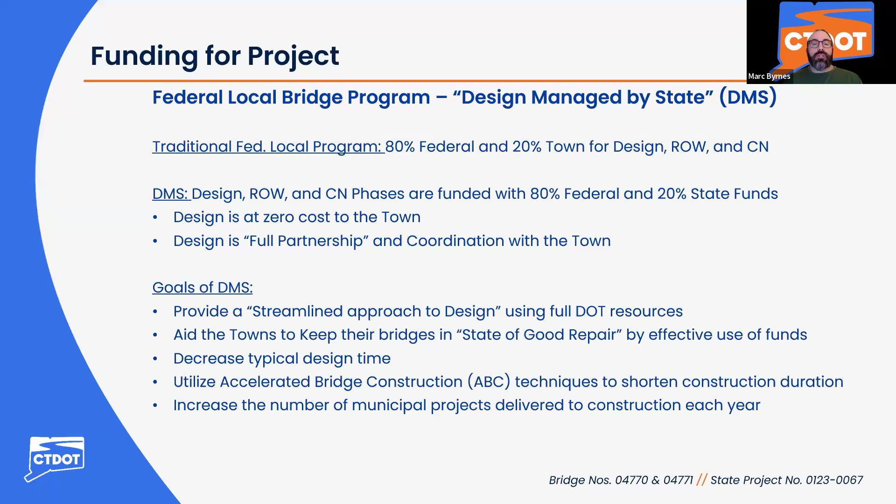Representing our consultant team at GM2 Associates is Mike Brady, project manager, and Dan Carnein, project engineer.

Bridges are rated on a scale of 0 to 9, with 9 being excellent and 0 being closed. Based on the conditions of the bridges tonight, these bridges are rated at 0, and corrective action is being taken.

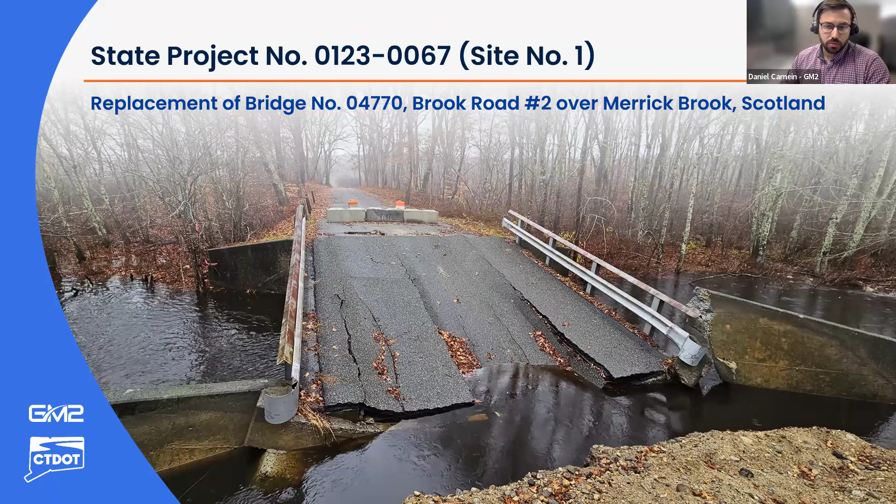We'll begin tonight with site number 1, bridge number 4770, which carries Brook Road over Merrick Brook. Site number 1 is located 0.8 miles north of the intersection with Route 14 and 97, and also 0.4 miles north of site number 2, bridge number 4771.

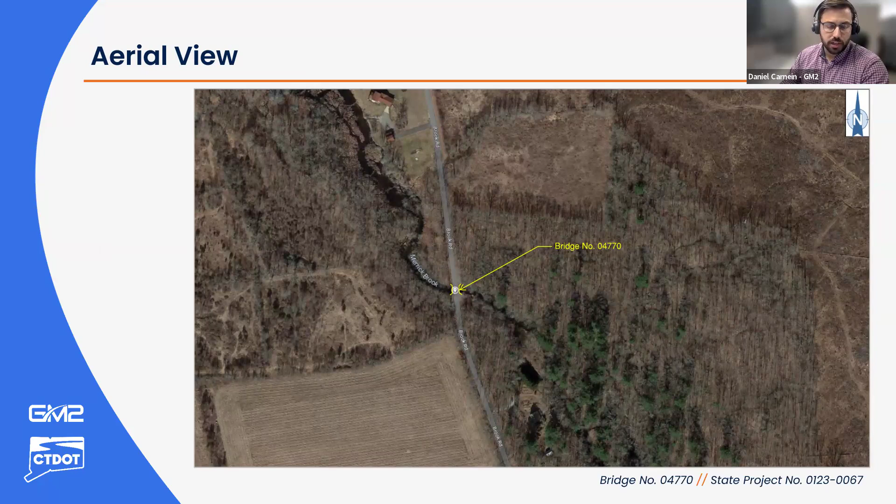The existing structure consisted of precast concrete beams on stone masonry abutments with concrete caps and wing walls. The original span length was measured at 22 feet, and the bridge had a 23-foot, 7-inch curb-to-curb width that accommodated 2 lanes of traffic. There are also no utilities on the bridge or at the site.

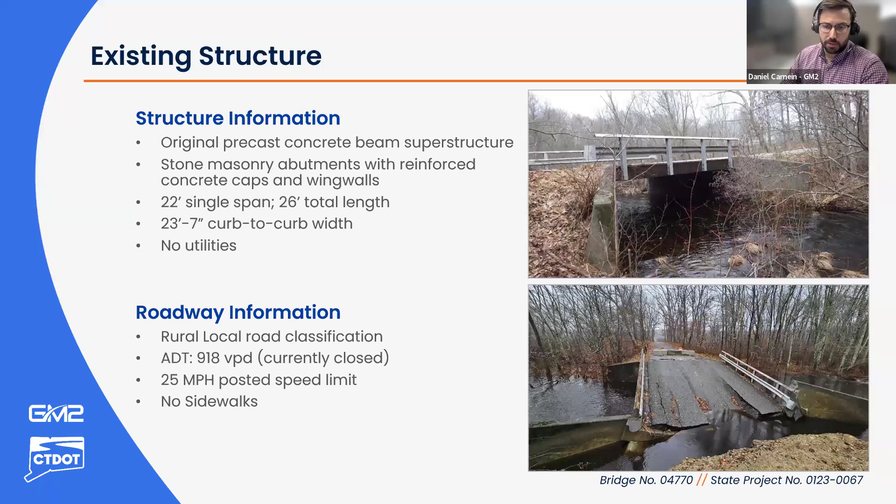The existing roadway is classified as a rural local road that had an average daily traffic of 918 vehicles per day prior to the closure. There is a posted speed limit of 25 miles per hour along Brook Road, and there are no existing sidewalks.

Looking at the current bridge approach condition, the bridge approach is currently blocked with concrete barriers and signs, but prior to the closure, the bridge approach had a fairly good overall rating of 7. We would like to note that there are no metal guide rail systems near the bridge, just wooden posts along the road.

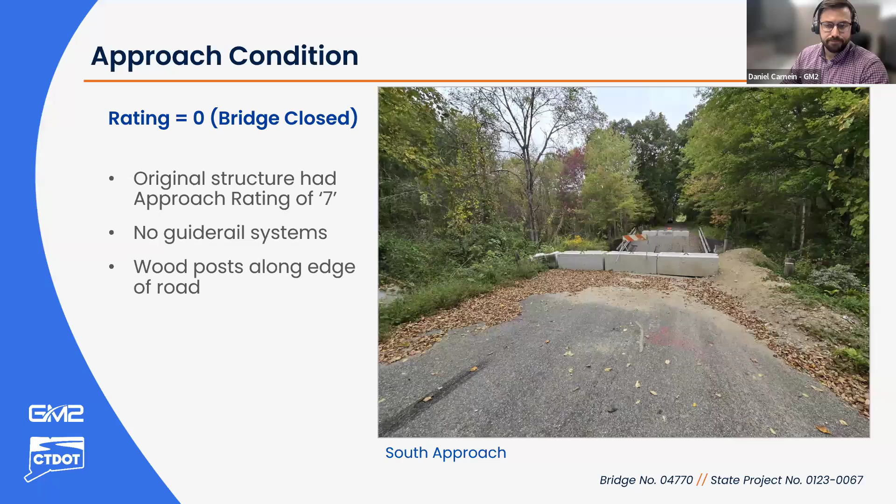Looking at the existing structure condition, the existing structure is rated 0 overall due to its failure. The original superstructure partially collapsed into the channel during the storm events in fall 2023, and the superstructure is currently leaning against the north abutment, with severe scour occurring at the south abutment, which led to its collapse.

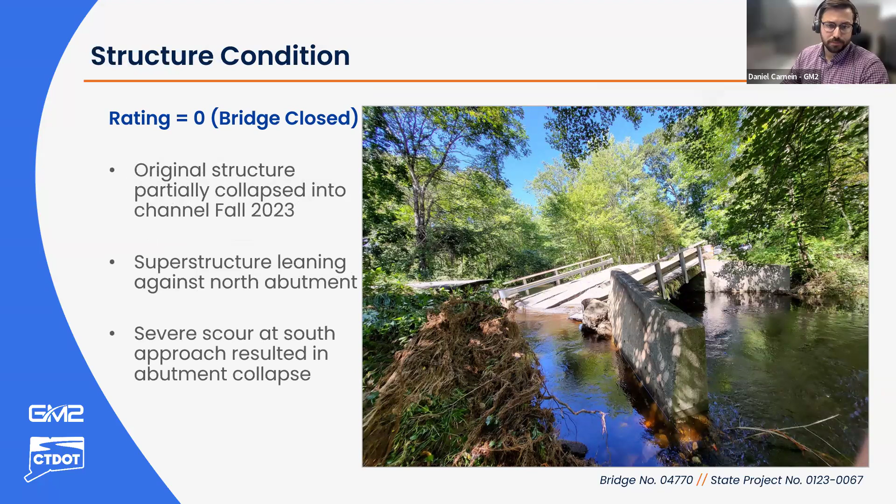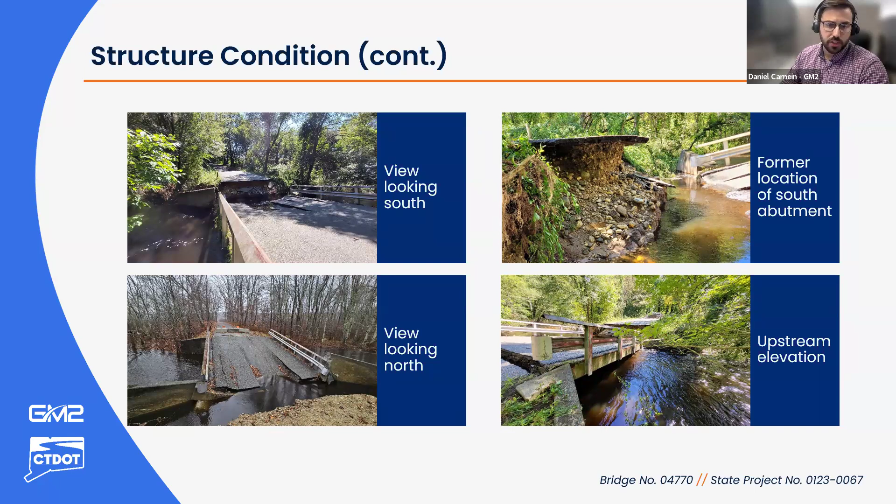The channel and scour are rated 0 due to the scour events that resulted in the bridge collapse. However, even prior to the failure, the bridge did have a history of scour and was rated scour critical.

The goal of project number 0123-0067 is to address all these existing conditions with the specific purpose of opening Brook Road and providing a bridge resilient to future flood events. The project will propose a bridge that addresses the original bridge's scour critical rating and will not fail to similar storm events.

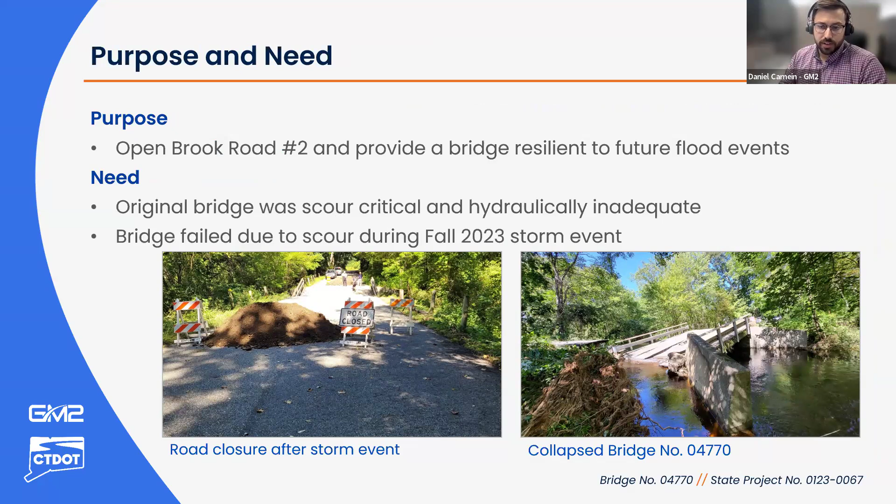The proposed structure improvements involve a precast concrete box beam superstructure on reinforced concrete integral abutments with a deep pile foundation. The integral abutment system eliminates the need for joints in the bridge, which will require less maintenance for the town over the bridge's lifespan.

The proposed bridge will have a much larger span length of 48 feet 2 inches and have a 24-foot curb to curb width for 2 lanes of traffic.

This project will also improve the hydraulic conditions at the site. The proposed clear span is going to be significantly larger than the original 22-foot span. This increase in span will allow more water to flow under the proposed bridge, and the roadway will no longer flood or overtop during a 100-year storm event.

We just want to note that the original bridge did fail during a calculated 50-year storm.

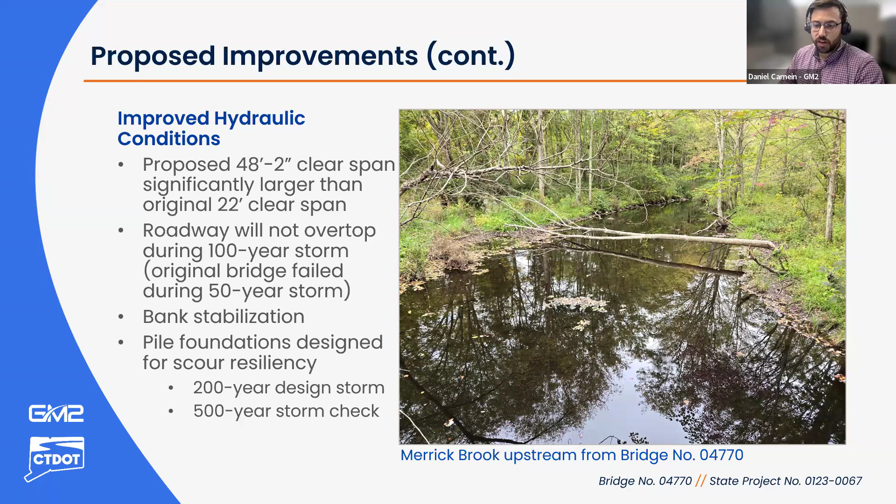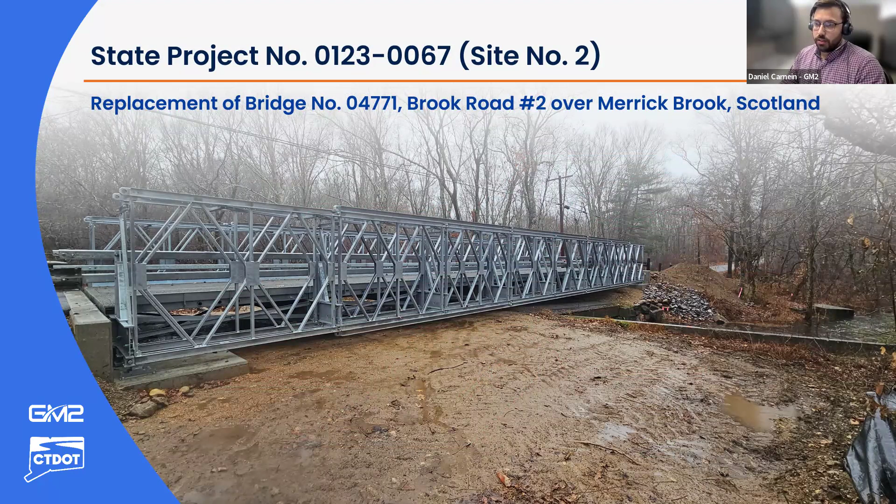Site number 2, bridge 4771, carries Brook Road over the Merrick Brook, approximately 0.4 miles north of the intersection with Route 14 and 97. Site number 2 is also approximately 0.4 miles south of site number 1.

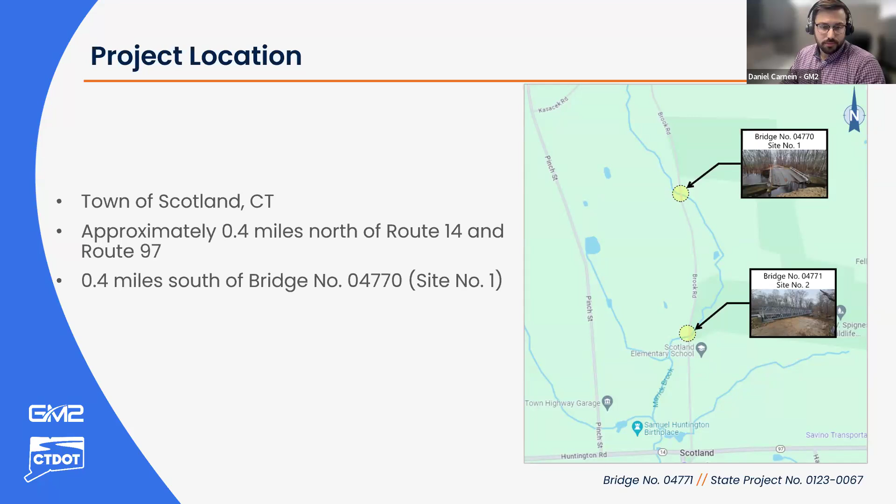This is an aerial view for site number 2, showing the bridge is, again, located in a rural, mostly wooded area. We would like to note that there is a Connecticut DEEP-owned wildlife management area to the east of the bridge, and Scotland Elementary School is located to the southeast of the project. We do again want to note that the school is close to the project; however, we do not anticipate any direct impacts to the school property.

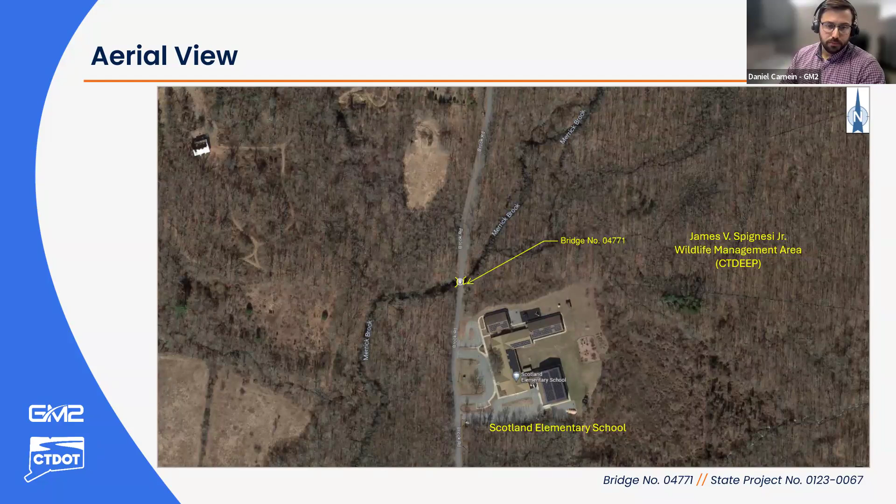The original bridge was a precast concrete beam structure supported by concrete abutments and wing walls. The bridge had an original span length of 22 feet and a curb-to-curb width of 22 feet 7 inches that had 2 lanes of traffic.

Currently, as the bridge stands today, there is a temporary ACROW bridge that was installed in November 2023 over the original bridge. The ACROW bridge has a total length of almost 81 feet and accommodates 1 lane of traffic.

The roadway is classified as a rural local road and had an estimated average daily traffic of 936 vehicles per day before the road closure at bridge number 04770.

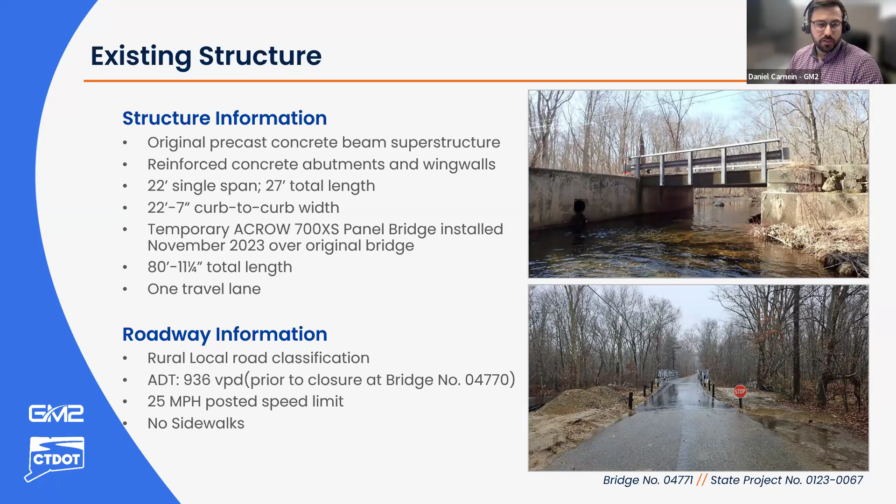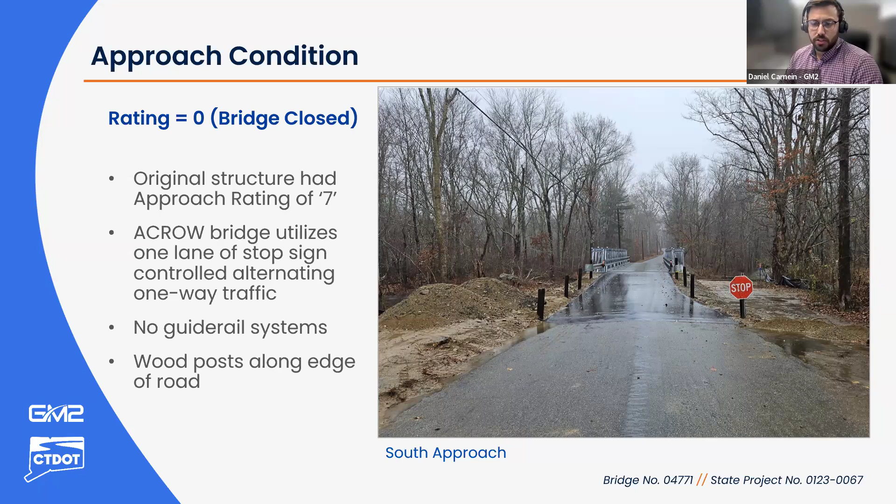Structurally, the original structure was undermined in that fall 2023 event, which resulted in a sinkhole behind the north abutment. The temporary ACROW bridge was installed in November 2023 to provide access to the properties between the failed bridges along Brook Road.

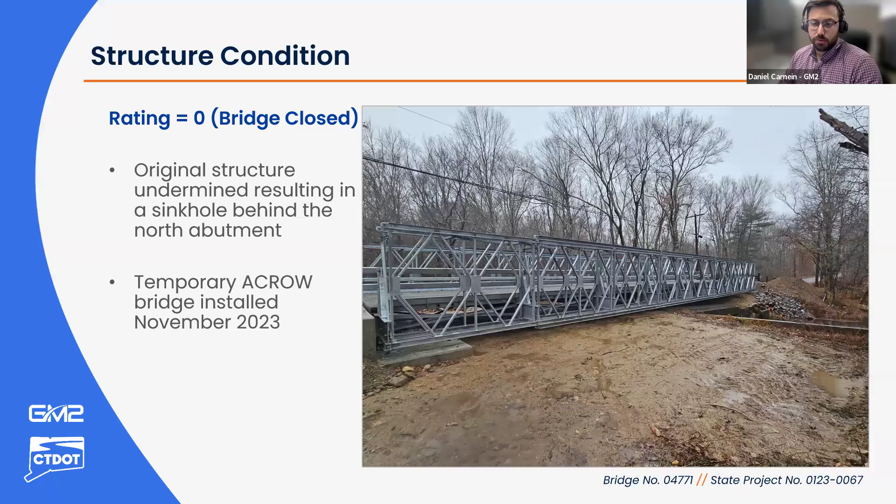Here's some more photos of the structure. Starting on the top left, that's a photo of the sinkhole behind that abutment just after the 2023 flood event. The top right photo shows a crack and differential settlement of that abutment just after the storm event. The bottom left photo shows the temporary bridge abutment being constructed in October 2023. The bottom right photo shows the current downstream bridge elevation.

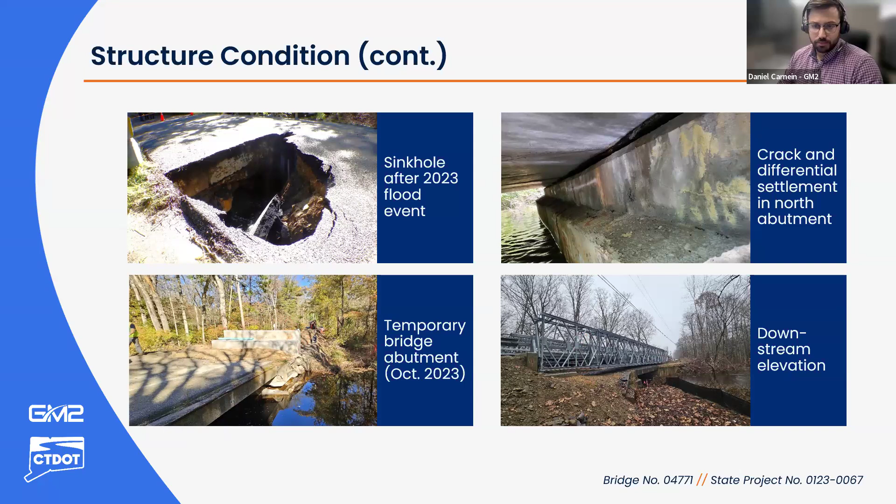This bridge has a scour and channel rating of 0 due to the failure, and it also had a history of scour and a scour critical rating prior to its failure in 2023.

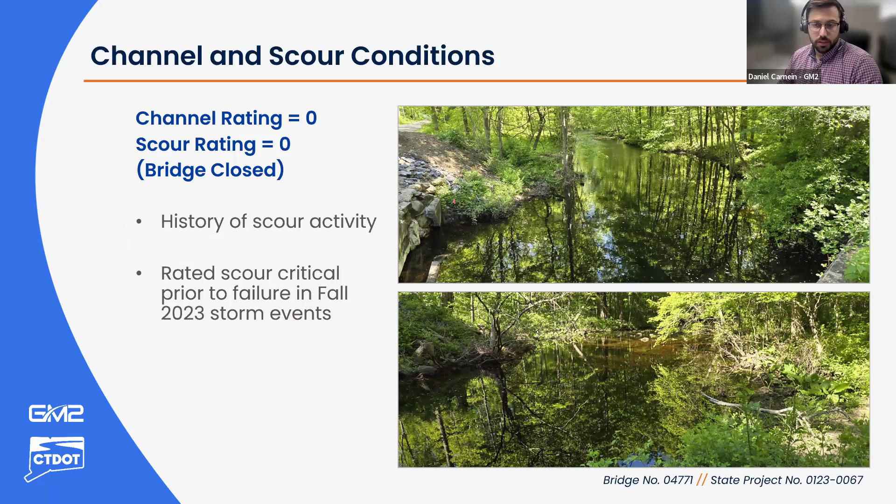The purpose of the project at this site is to provide a permanent bridge resilient to future flood events. The proposed bridge will eliminate the scour critical rating and improve the hydraulic conditions that led to the original bridge failure.

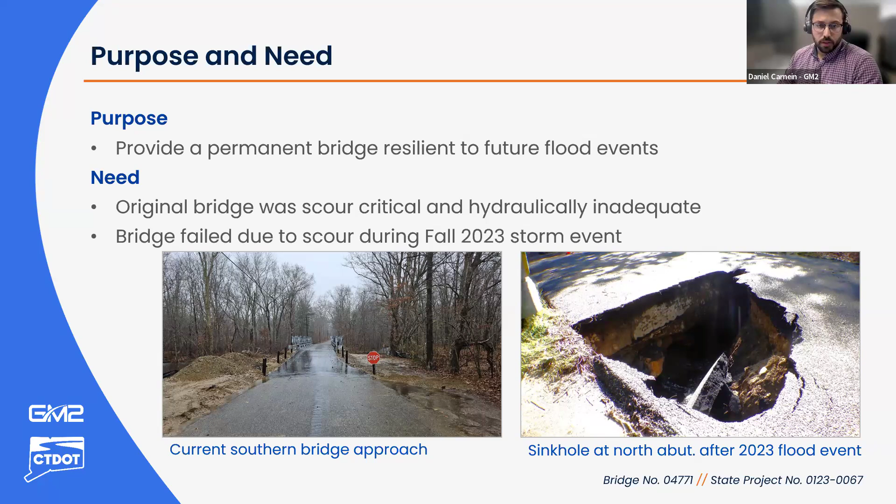The proposed bridge for site number 2 will be a mirror image and almost identical to the proposed bridge for site number 1. The information on this slide should look very similar, because bridge number 04771 will have the same beams, abutments, foundations, length, width, and barriers as site number 1, bridge number 04770. It'll also have the same guide rail systems and a dry hydrant.

The reason for this is the goal is to reduce design time as much as possible for these 2 sites, so we want to use as many of the same details as possible between the 2 bridge sites.

Site number 2 will have the same hydraulic improvements as site number 1 and eliminate roadway flooding during the 100-year storm events. The proposed bridge will also be resilient to scour, and the foundation will be designed for the 200 and 500-year storm events.

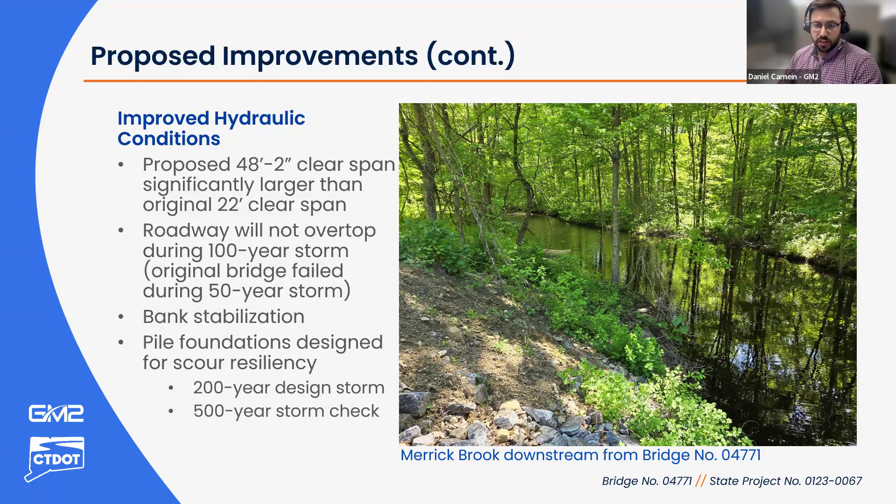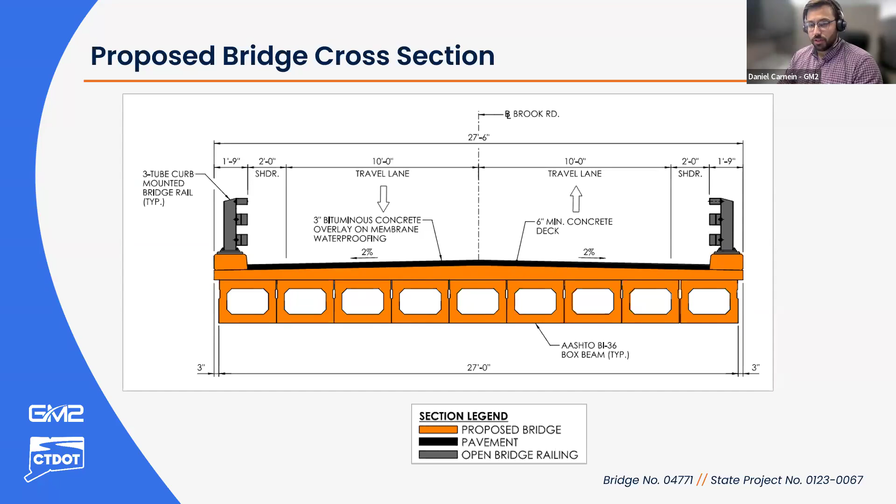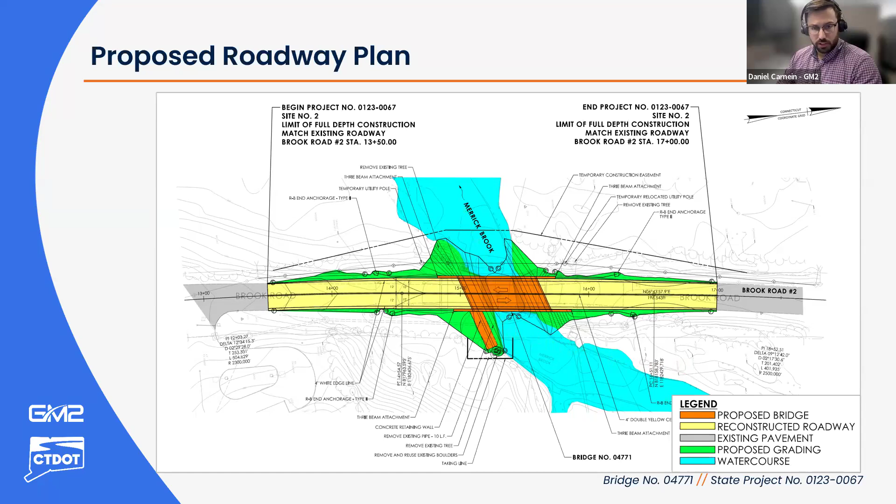Additionally, that wall will help guide water under the bridge during any storm events. Water will come up to the wall and be directed under the bridge to help reduce flooding.

Construction for site number 2, bridge number 4771, will utilize the same detour as site number 1. Therefore, construction on site number 1 will need to be substantially complete and the roadway open prior to construction on bridge number 4771. Again, the main goal is to maintain access to the properties located between the 2 sites.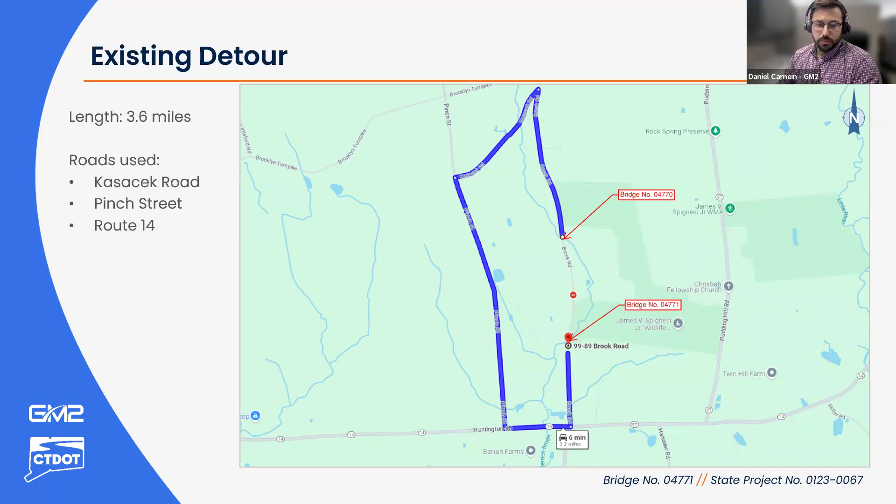We will obtain all necessary permits for site number 2, bridge number 04771, and we anticipate the same permits as site number 1.

Lastly, these are the anticipated property impacts for site number 2, bridge number 04771. We anticipate a temporary construction easement on the town-owned property located to the west of the bridge. This easement is required to allow the contractor access to the channel to perform certain construction activities, and it'll be used as well for temporary overhead utility relocation. Those utility relocations are shown on the downstream side.

On the east side of the bridge, we anticipate a partial take that will be required for the proposed retaining wall that will replace the existing flared wing wall. Partial take is needed since the proposed wall extends beyond the street right of way, and that area will be needed to build and maintain that proposed wall. Please note that this partial take and the minimal wall impacts take place on the Connecticut DOT owned property.

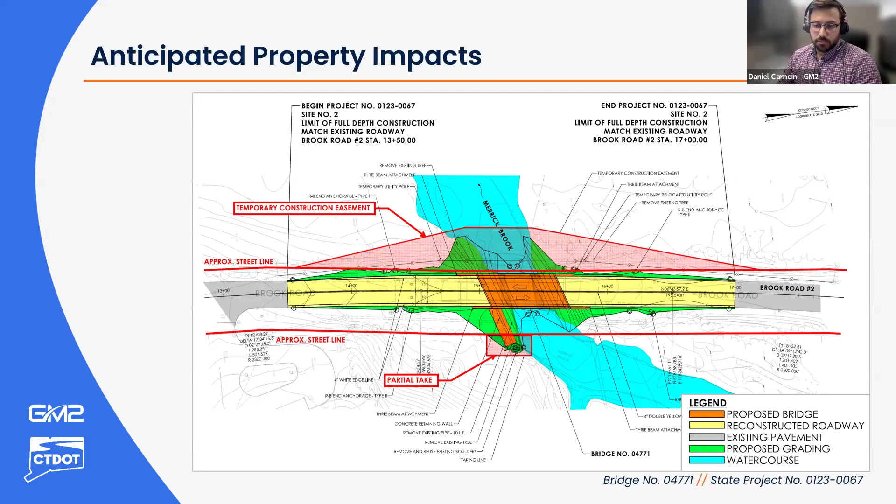So this is the overall schedule and cost for the project, including both sites. Currently, construction is scheduled to start in spring 2027 based off the standard design, rights-of-way, and permitting process. This date is subject to change, and we are accelerating the design with the goal of starting construction in 2026.

Construction will take place on Brook Road over 12 to 16 months, or 2 construction seasons. The first construction season will be used for site number 1, bridge number 04770, and the second construction season will be used for site number 2.

The total construction cost for the project is approximately $5.6 million. Site number 1 has an estimated cost of $2,478,000, and site number 2's cost is $3,068,000. The cost for this project will be covered by 80% federal funds and 20% state funds, and at no cost to the town.

At this time, I'll turn it over to Zach from CTDOT to talk about the design right-of-way process.

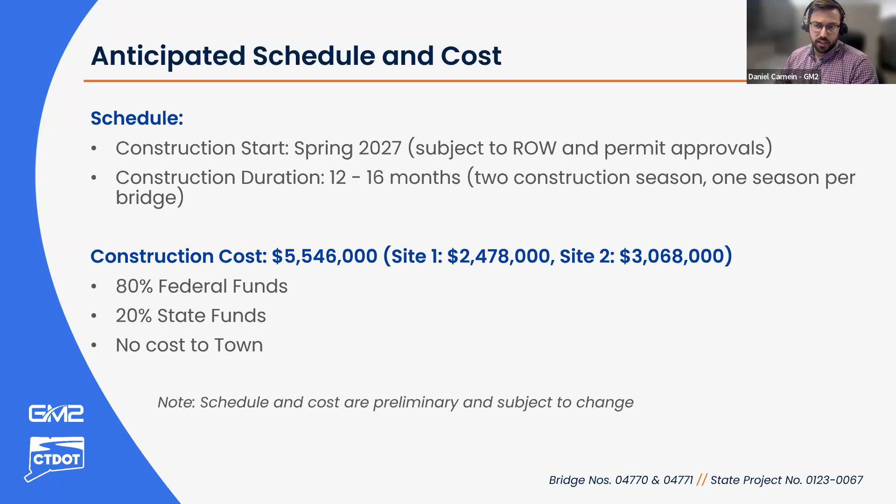Thanks, Dan. My name is Zachary Guarino, and I'm a project coordinator with the Department's Division of Rights of Way. Our office is responsible for acquiring the property rights needed for transportation projects. As Dan mentioned in the presentation, this project will require the acquisition of property rights, so I'd like to give a brief overview of our acquisition process.

Before I begin, I'd like to mention the specific impacts are still being finalized and they may change as the design progresses, and that any required property rights will be acquired in accordance with Connecticut General Statutes, sections 13A-73 and 13A-98E, as well as the Uniform Act. Go ahead and change the slide.

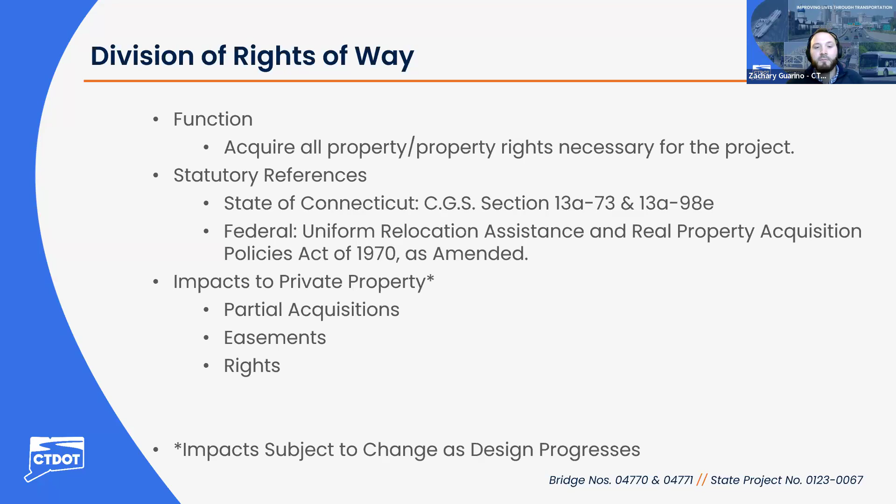The right-of-way acquisition process begins once the design has progressed to a development milestone and all the impacts have been determined. At this point, each affected property owner will receive a formal letter of intent to acquire from our office, along with a property map which depicts the exact property rights to be acquired. On the screen here is an example of a property map that an owner may receive. It shows the existing conditions as well as the proposed improvements.

Next, our office will determine the fair market value of those property rights which were depicted on the map, and use it to establish an offer of just compensation. That offer will be sent out to the property owner in writing, and a right-of-way agent will be available to meet with the property owner, explain the project, go over the specific impacts to their property, and explain how the state arrived at its offer.

The property owner will be given a reasonable amount of time, typically 30 days, to consider the state's offer and enter negotiations. When an agreement is reached, the department will prepare all the necessary paperwork to record the deed and property map on the town land records.

However, if agreement cannot be reached, in order to keep on schedule, the department may acquire the necessary property rights through its power of eminent domain. In that event, the state files a notice of condemnation in the Superior Court along with a monetary deposit in the amount of the state's offer.

The owner would have 6 months from that date to file an appeal if they felt that the state's offer was inadequate. Whether or not the owner chooses to appeal, the money deposited in the court is available to be withdrawn by the owner. It's important to note that the state only acquires property rights that are needed for the specific project. If there are any questions regarding the right-of-way acquisition process, I can answer them after the presentation.

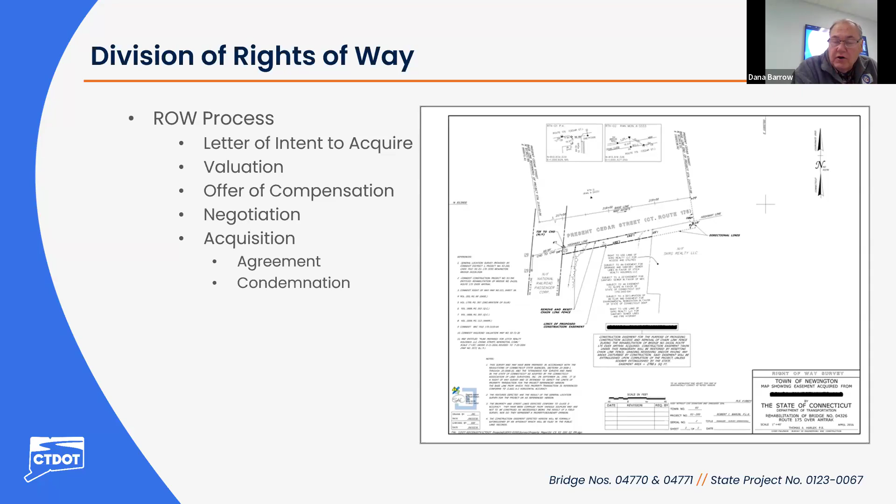I'd like to thank GM2 consultants and the department in DOT, the bridge design areas and construction areas for all the help in working on this project. We appreciate it.

The bridge looks great. I'm looking forward to seeing it all done, and it'd be great for traffic flow. Eventually the town will, maybe in a few years, go back to a little bit of normal transportation. We are hoping it gets done a little earlier.

One of the things that doesn't actually show on the slide is the fire department is just south of the elementary school. So anytime we have a call in the north end of town, the fire trucks or ambulance have to head south. And when we go mutual aid to an ambulance or fire call to the town of Hampton, or Chaplin, which is north of us, we again have to head south first and go out route 14 before we head north that way.

So that adds a lot of time to the response time. That's one thing for the convenience of the people, but it's also an emergency situation where we're adding time to a call, especially if it's an ambulance call. Sometimes you have 4 to 6 minutes if somebody's having a heart attack, so that extra 2 or 3 minute detour may make a difference.

That's why we're pretty adamant about seeing how we can get these bridges fixed as quick as we can. I know you have to go through the permit process, but I'm sure we can help any way we can, maybe get Joe Courtney involved, or whatever we can do to help move it along faster, especially on this one, because it affects emergency responses more than the other two bridges being done. So again, I want to thank everybody for working hard on it, and we look forward to moving forward.